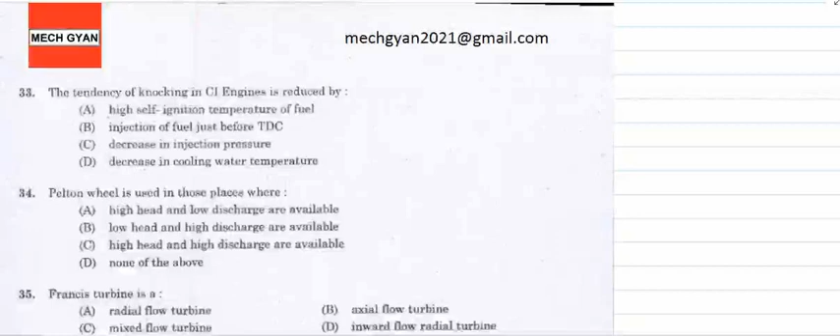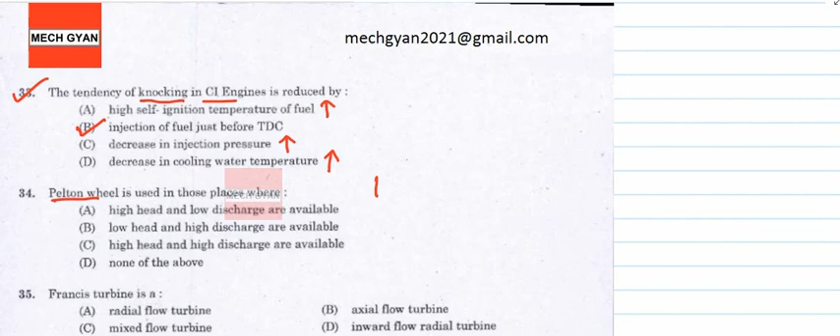Let's move on to question number 33. The tendency of knocking in CI engine is reduced by injection of fuel just before TDC. High self-ignition temperature of the fuel increases knocking. Decrease in injection pressure increases the knocking in CI engine, and decrease in cooling water temperature also increases knocking. So the only correct option is injection of fuel just before TDC. Next, Pelton wheel is used in places with high head and low discharge, so the option is A itself.

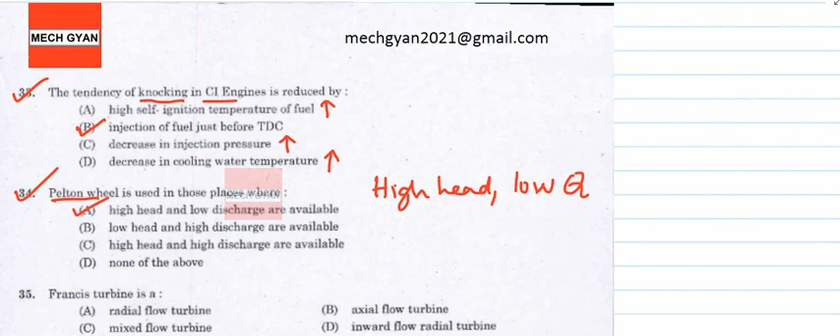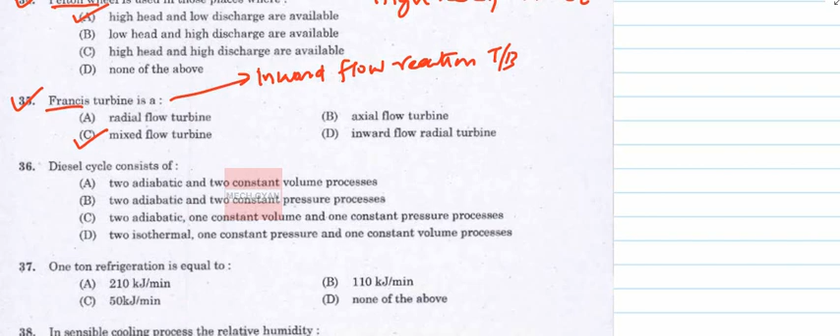Question 34, option A, Francis turbine. Question 35: Francis turbine is basically a mixed flow turbine, option C. Francis turbine is an inward flow reaction turbine, and it combines radial and axial flow. Since it combines both radial and axial flow, it is called a mixed flow turbine.

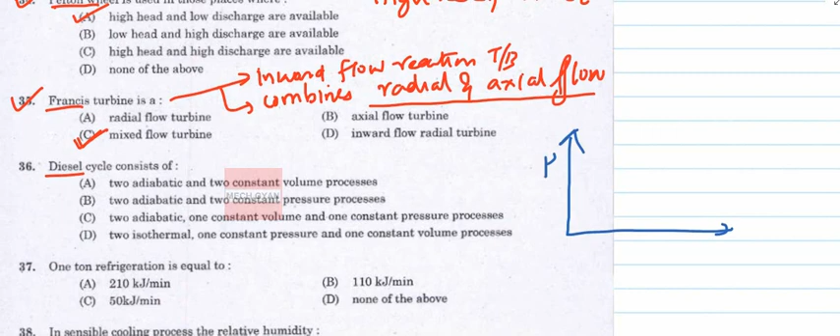Question number 36: Diesel cycle consists of. Whenever questions on such cycles arise, you just need to draw the cycle on a PV diagram. So for the diesel cycle, we draw it on a pressure volume diagram, represented by this curve.

So basically this is heat injection and this is heat rejection. The diesel cycle has one constant pressure heat injection and one constant volume heat rejection. So two constant volume is wrong, two constant pressure is wrong; one constant volume and one constant pressure is correct, and these processes are basically adiabatic processes. So for question 36, the answer is C.

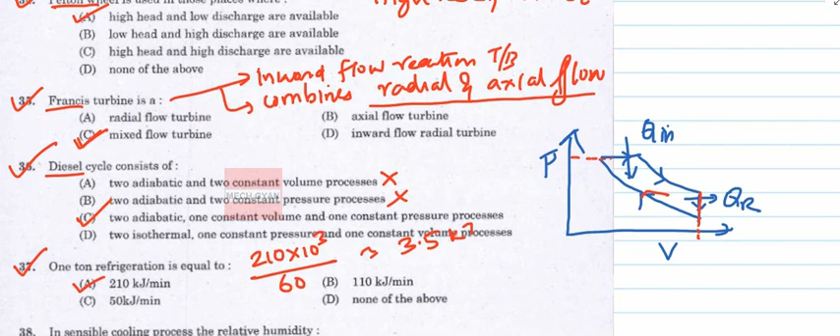Now 37, 1 ton of refrigeration, it's a straightforward question. The answer is 210 kilojoule per minute, option A. In some competitive exams they ask in terms of joule per second. 210 kilojoule per minute can be written as 210 into 10 cube by 60, which is 3.5 kilojoule per second. 210 by 60 is 3.5 kilojoule per second, which into 10 cube means it will be 3500 joule per second.

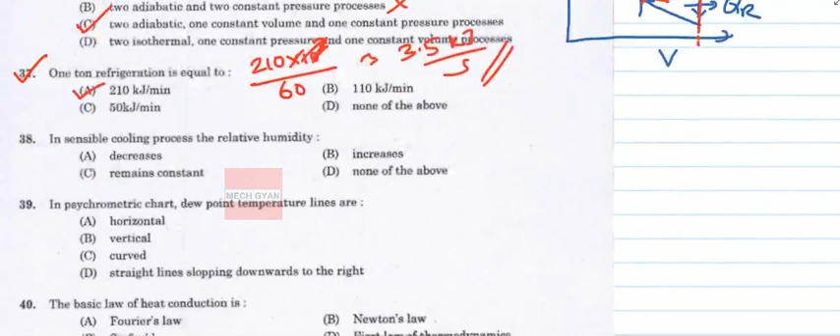Now question number 38: in sensible cooling process, the relative humidity - this is a very good question. In sensible cooling process, we have to draw the psychrometric chart, so we will quickly draw it so that we can answer both 38 and 39.

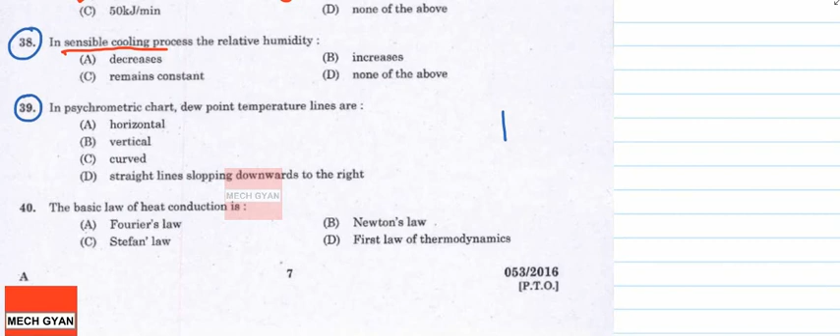The psychrometric chart will look like this, where this axis is dBT, dry bulb temperature, with increasing temperature denoted this way, and this axis is the specific humidity - note that it is not the relative humidity. Now, sensible heating means temperature increases in this direction. Sensible cooling means it goes in this direction.

Humidification is this process, shown in another color. Dehumidification is when we go down. Heating plus humidification is denoted like this. Similarly, cooling and dehumidification is denoted this way. Now the question is: in the sensible cooling process, what happens to relative humidity?

These are basically the relative humidity lines - here it is 100%, 90, 70, etc. During sensible cooling, what happens? The relative humidity basically increases. This is increasing relative humidity. So for question 38, the answer is option B.

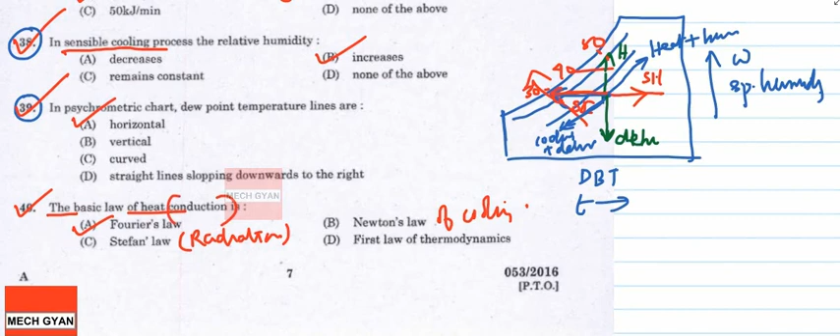Question number 40: the basic law of heat conduction, which we have been studying from lower classes, is Fourier's law of heat conduction. This is basically Newton's law of cooling for convection and Stefan's law for radiation. So for conduction, it is Fourier's law of heat conduction.

Let's move to question number 41: if a body reflects all radiation incident on it, then it is known as - the answer is option C. A body that reflects all radiation is called a white body. A black body, on the other hand, absorbs all radiation.

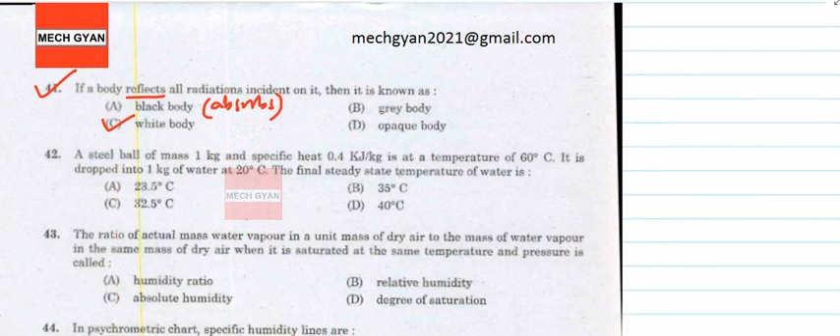Question number 42: a steel ball of mass 1 kg and specific heat 0.4 kJ per kilogram is at a temperature of 60 degrees centigrade. It is dropped into 1 kg of water at 20 degrees centigrade. The final steady state temperature is - so the steel ball of mass 1 kg, specific heat 0.4, is dropped into water, initially at 60 degrees centigrade. Let the equilibrium temperature be Tf.

Heat given by the ball is equated to 1 into Cp of water, 4.18 into Tf minus 20. We need to find the final steady state or equilibrium temperature Tf. So 60 minus Tf equals 4.18 by 0.4 which is 10.45, times Tf minus 20. So 269 equals 11.45 Tf, giving Tf equal to 23.5 degrees centigrade. Option A is the right answer.

Question 43: The ratio of actual mass of water vapor per unit mass of dry air to the mass of water vapor for the same mass of dry air when saturated at the same temperature and pressure is called the degree of saturation. This is basically the definition of degree of saturation.

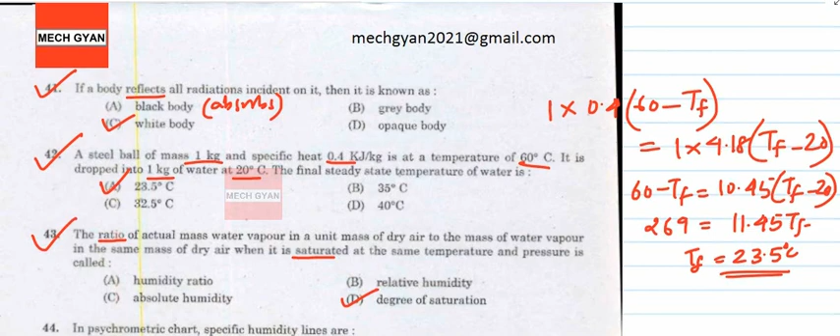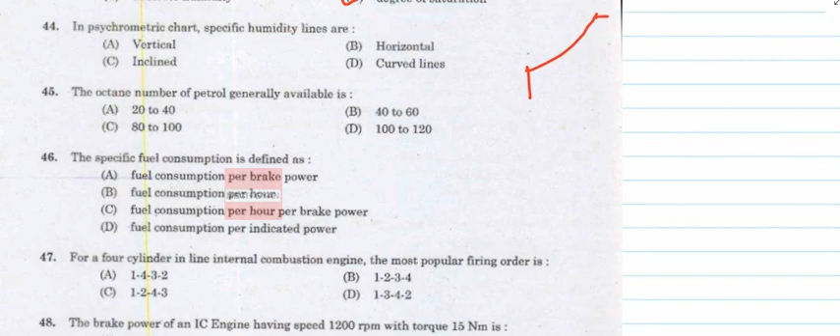Question 44: On the psychrometric chart, the specific humidity lines. We've already seen the detailed psychrometric chart, and specific humidity is denoted like this. So specific humidity lines are basically horizontal lines. The answer for 44 is option B.

The octane number of petrol generally available would be around 80 to 100. Octane number is basically used to measure anti-knock quality. For measuring octane number we use isooctane and normal heptane. So the octane number of petrol would be in the range 80 to 100.

Specific fuel consumption, question 46, is defined as fuel consumption per hour per brake power. So for 46, the option is C.

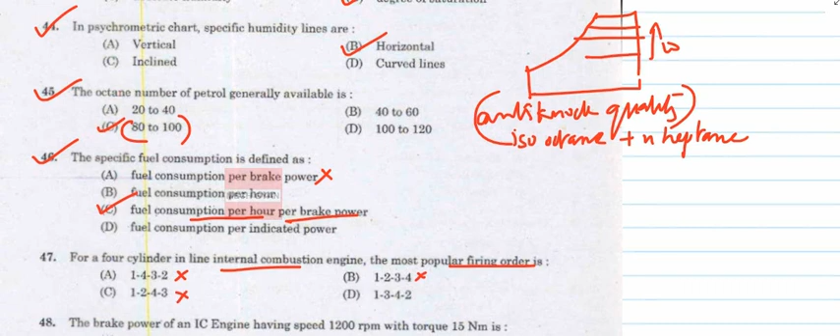For the 4-cylinder inline IC engine, the most popular firing order: 1432 is wrong, 1234 is definitely wrong, 1243 is wrong. For question 47, option is D, 1342 is the popular firing order for a 4-cylinder IC engine.

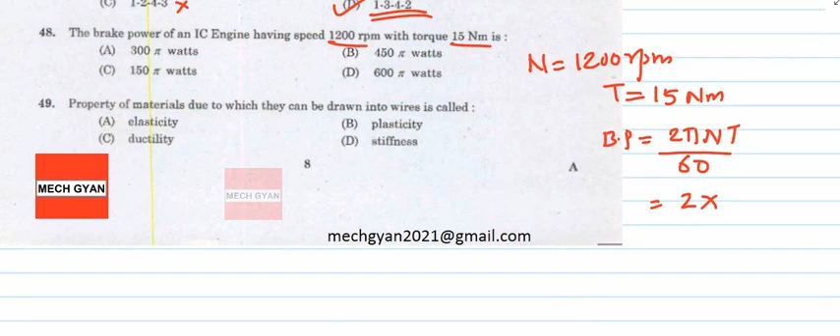Question 48: The brake power of an IC engine having a speed of 1200 rpm with a torque of 15 Newton meter. Speed n equals 1200 rpm and torque equals 15 Newton meter. Brake power equals 2 pi Nt by 60. All the answers are given in terms of pi, so we write 2 into 1200 into 15 by 60 times pi, which equals 600 pi. So 600 pi is the right answer, and the answer for 48 is D.

Question 49: The property of a material due to which it can be drawn into wires is basically ductility. The property of a material by which it can be drawn into wires is ductility.

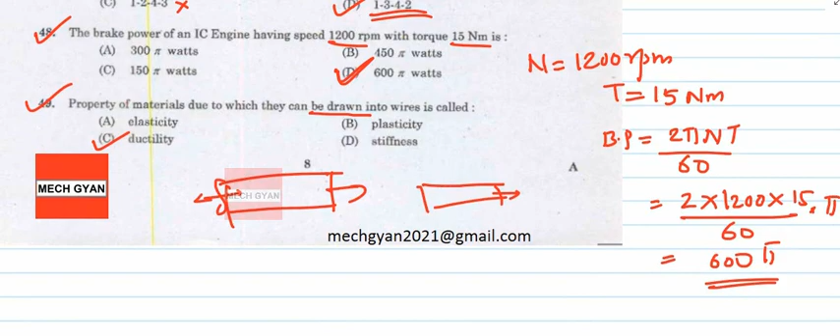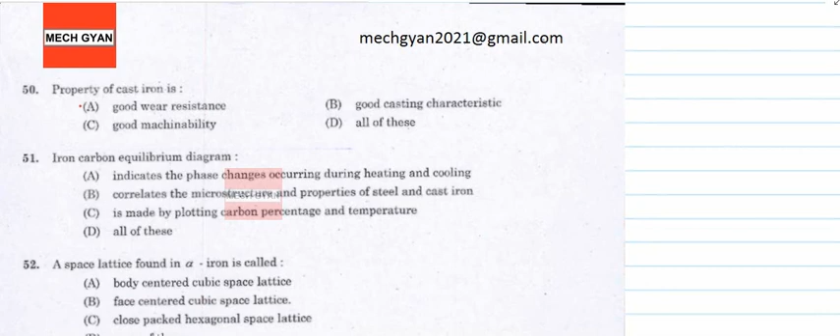Question 50: The property of cast iron. Cast iron has good wear resistance - correct. Good casting characteristics - correct. Good machinability - correct. So the answer is all of these, option D.

Question 51: The iron carbon equilibrium diagram indicates the phase changes occurring during heating and cooling - yes. It correlates the microstructure and properties of steel and cast iron - true. It is made by plotting carbon percentage and temperature - also true. So the answer is D.

For the iron carbon diagram, on the x-axis we have the percentage carbon, and on the y-axis we have the temperature. Initially we have steel, and the maximum solid solubility of carbon is around 2.1%, where we have cast iron. So all these options are correct.

Question 52: The space found in alpha iron is BCC, body centered cubic. That is the space lattice for question 52.

Answer is A. Question 53 was already cancelled by Kerala PSC, so let's move on to 54.

Question 54: Draft on pattern for casting. Draft is provided on the pattern to facilitate its removal from the mold. For 54, the answer is D.

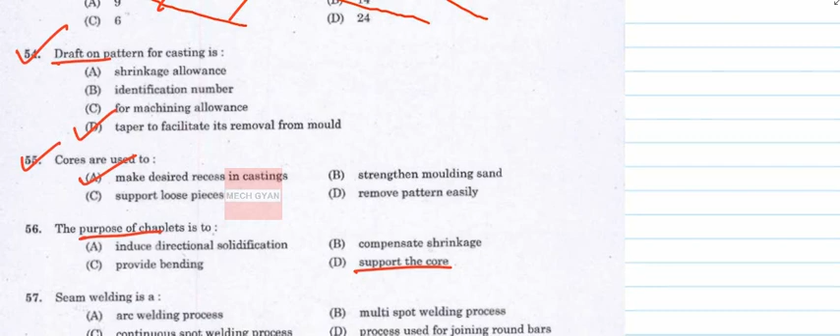Seam welding - it is a spot welding process which is continuous, not an arc welding process. This continuous spot welding process is known as seam welding. For question 57, the answer is C.